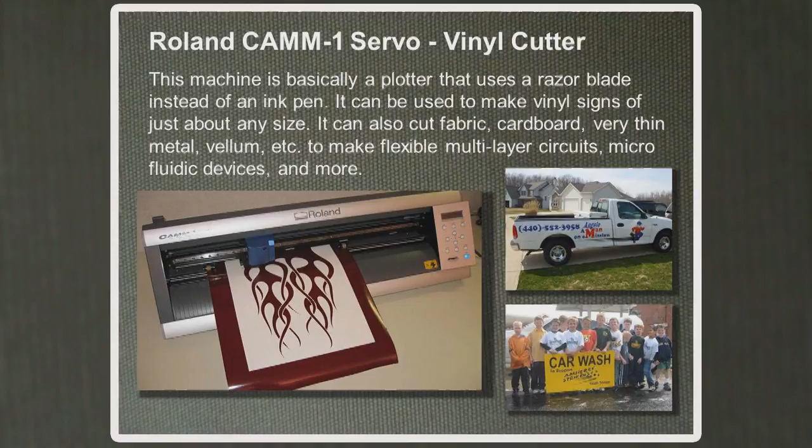I've even made microfluidic devices like flexible thermometers using the vinyl cutter. But it's made for doing the things you see over there on the right, like the signs on college vehicles, signs around campus, and people use it for garage sale or car wash signs, whatever they want.

This is the Roland Modela mill, probably the least used piece of equipment. It's very small, like the size of a printer, but it's very precise.

This same company also sells equipment used for making things like jewelry molds and teeth for dentists. They can make artificial teeth and things like that. So its claim to fame is that it's very precise.

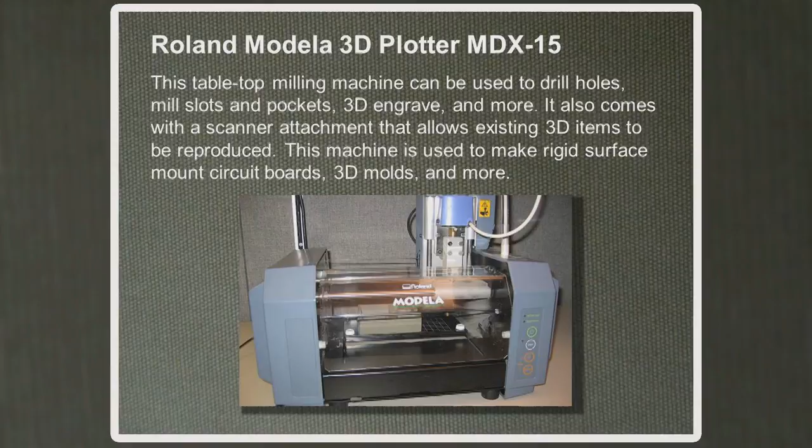It's not very large. The biggest thing we do with it is cut molds, using a foam material. It's fairly soft, not very durable, so it wouldn't be usable as a final product, but we could use it just to show somebody what the three-dimensional shapes look like.

That machine can cut parts about this size, very precisely, three-dimensional objects and things like that. The big thing we use it for, though, is to make circuits.

This is an example of a circuit made using the Modela mill. We start out with a piece of normal copper. It's not conductive on the back, and it is conductive on the top. We remove, by machining away, the copper we don't want.

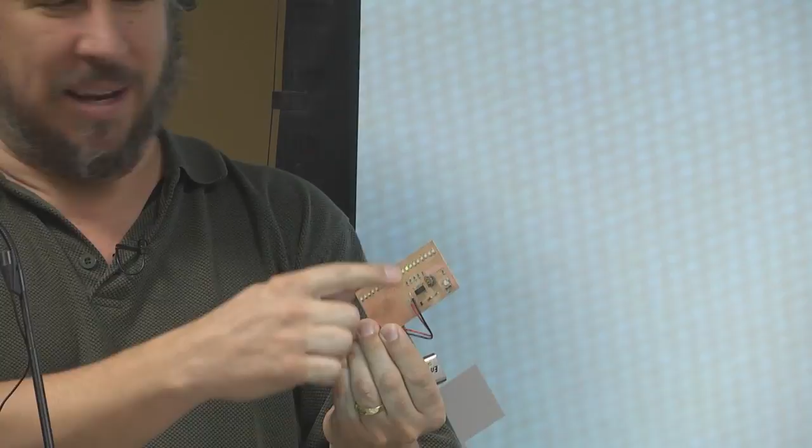When you solder that together, you end up with a complete circuit. This circuit might not look like much, but it's basically a computer. There's a chip that's been programmed - it tells it how to react, what to do. It can run multiple sequences and things like that.

And what amazes me is this whole board probably cost $1 or $2 to make. So this was the type of thing you might use as part of a prototype, to prove a concept, to make a one-of-a-kind item or whatever. You can do it very easily using the components and equipment you'd find in the Fab Lab.

Probably the most popular piece of equipment in the Fab Lab is the lasers. Our lasers are not very powerful. We have a small one called Mini that's 25 watts, and a larger one that's 40 watts. Think of a 40-watt bulb - it's not very bright, but it concentrates all that energy in one space.

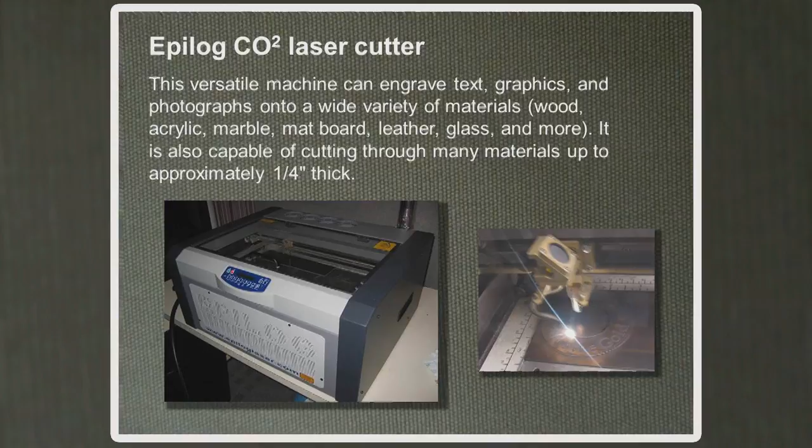There's a couple things you could do with it. It works with a lot of organic materials - cloth, wood, cardboard, and things like that. It will not cut metal, so that's one of the big limits of it. There's also some materials we can't put into it, because if it burns them, it will create toxic gases. Vinyl would be an example of that type of material.

With that machine, we can do things like engraving. This is somebody who was experimenting with engraving on denim, and it gives a pretty neat look. That's very easy to do - you just take a photograph, send it over, and it laser engraves it in.

What I like to use the laser for is cutting things like cardboard. I thank Dell for sending me lots of materials - we have an endless supply of this stuff, it appears. This is an example of a small table that I had made.

You don't want to waste a lot of time and material making it just to find out it's not going to work or that there's some flaw. So we typically will cut it out of cardboard or wood first. This is an example out of cardboard.

This would be an example out of really thin wood. You can see that you can put it together, see if it works, see if you need to make any changes, and when you're done, you go to the next level. We have another machine that can cut wood, and this would be the example of that same design.

I made some practice cuts. This is what one of the legs would look like when you put it together. Once I've got it all figured out, then I send it over, and it actually makes tables, and we can make one table or many.

But the lasers, like I said, we do a lot with them. People engrave with them. One of the things that's probably most impressive is the lasers are so precise that we can predict for the amount of material that's removed by the laser beam, and you can make things like this. This is a press-fit jewelry box, and it is so precise at such high tolerances that it will snap together, and just friction holds it together.

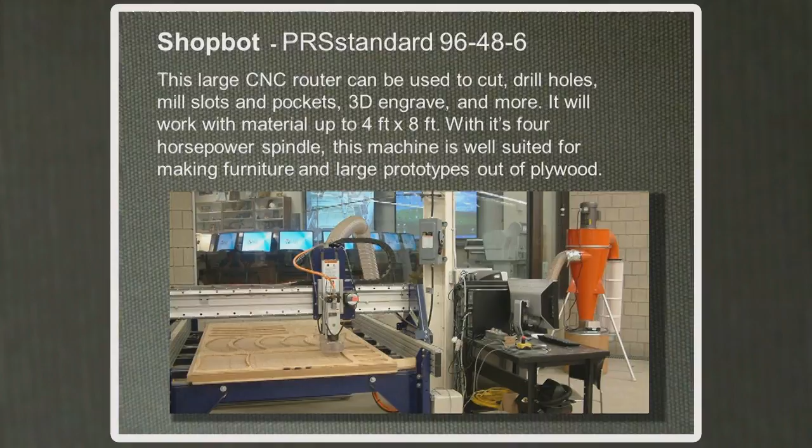The piece of wood you see inside the machine is 4 foot by 8 foot, a full sheet of plywood. So with this, we could easily make things like furniture, full-size chairs, cabinets, and things like that. This takes it to the next level. It really allowed us to make bigger, more usable objects than we had up to that point. But it's computer controlled, and believe it or not, it's very similar to the Modela mill—it's the same thing, just much bigger and stronger. It's even programmed very similarly. So that's getting to be fairly common.

There's some stuff in the Fab Lab that not everybody knows we have. It's in a cabinet, not something everybody notices sitting there. One of the things we've had for a while is a 3D scanner. It kind of looks like a metal lunchbox, but it's got 2 cameras in it and laser beams. You set an object on a turntable in front of it, and it will shine light on it and be able to completely determine all of its dimensions.

So most of what we do in Fab Labs is how do I go from the bits of the computer to the atoms of the real world. This goes the other way around. I start with a physical object I already have—whether it's a one-of-a-kind object that I can't find another one of, or maybe I've molded it by hand and it's very unique and organic.

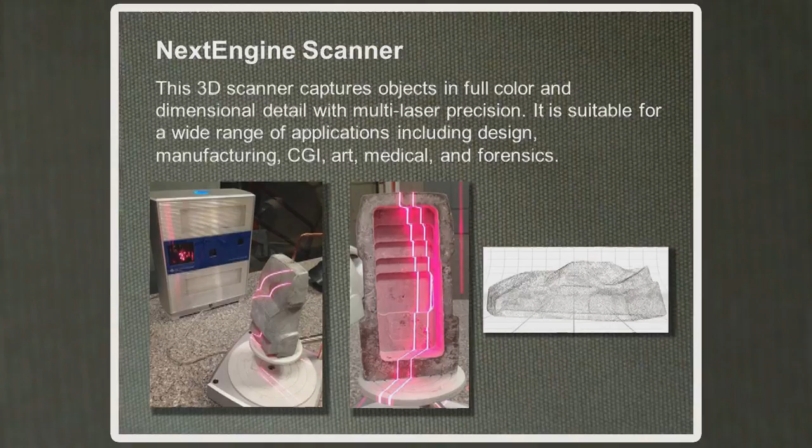What this does is it scans the object in and converts it into bits. The image you see on the right is what's called a point cloud—it's all of the dimensions related to that surface. It's a time-consuming process to scan in an object, and there are lots of limitations, but it gets the job done if you have enough patience.

But that wasn't good enough, and we got kind of frustrated by that one—it could only work with small objects and was very time-consuming. So within about the last 6 months, the Lorain County Manufacturing Council was nice enough to make a donation so that we could buy one of these.

So we now have what's called a GoScan 3D scanner, and as you can see, it's handheld. You hold it and point it at the object, and it shines what kind of looks like a barcode. What's amazing is that as you're shining it on the object, all of the information appears on the computer in pretty much real time. If you miss a spot, you just go back over it and it adds it in, so you can interact with it.

This also scans much larger objects—it's possible to scan something as big as your head or bigger. You could scan a whole person, but usually you use objects about this big, and it's a very quick process. That's a huge change in the technology, and we're very lucky to have it.

This is something else we've had for a while. Like I said, the idea behind Fab Labs was that we'd have that Star Trek replicator where you could walk up to a machine and it would just make anything you want. Now, the closest we have to that is this machine here—a commercial 3D printer. You send it a 3-dimensional file and it prints the object out of plastic.

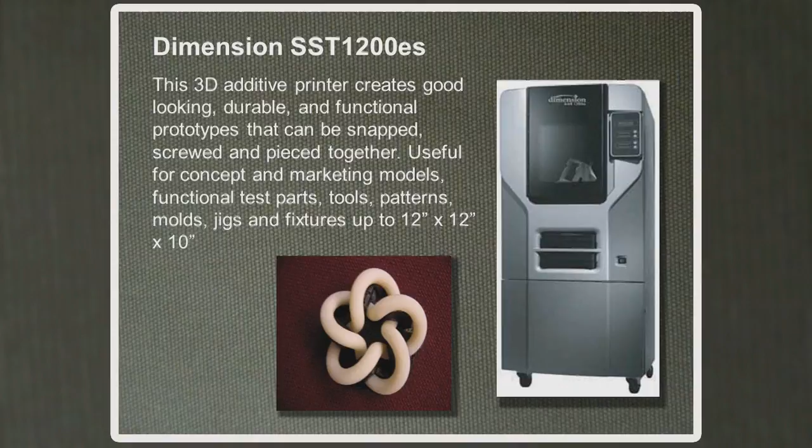This is the material we start out with—it starts out in a spool. We can only buy it from the company that makes it, and we use 2 types. This is the modeling material, the ABS plastic, and our machine also has what's called soluble support. There are some black parts here used as scaffolding and to fill gaps. That will dissolve away—it's brittle, it snaps off, and if we put it in a tank it'll completely dissolve out, allowing us to do some pretty amazing things.

So the example we usually use is this wrench. The black you see is the support material. The very first thing it does is melt this material through what's like a hot glue gun into a really thin, hair-thin thread, then lays it down one layer at a time, lowering the table and building the object bigger and bigger. The black is the support material, and the yellow is the ABS plastic.

We purposely stopped this one in the middle so you can see the different parts of the assembly—places where the two parts don't come together. When it's done, we peel it off the plate and it looks like this: you have the support material, the plastic, and in between all the nooks and crannies there's also support material. Then, when it comes out of the tank, it looks like this.

What's amazing about this is that it's functional. Most processes used in manufacturing are subtractive—you start with a big chunk of wood, cut away everything you don't want, and end up with something. This is additive; we build it from a starting material.

This is only going to evolve—it's going to get better materials, it's going to get faster, it's going to get cheaper, it's going to get easier to use, and they're starting to get into different materials.

Just like you had a black and white printer, now we have what would be the equivalent of a color printer, but it prints different color material, or maybe materials with different properties, where part of it could be rigid and other parts flexible. You might have read online about 4D printing. 3D is the dimensions, but the fourth dimension would be the material, where you could give it properties where maybe part of it is conductive, part insulative, maybe you heat it up and it bends to a shape. It could actually assemble itself based upon the properties of the materials.

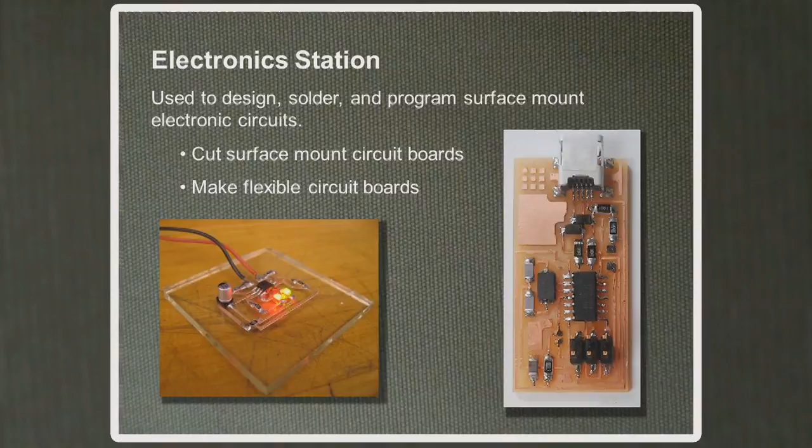So this is what one of the parts looks like that I make. And the neat thing about this is I could go from a machine that could only cut wax to a part that's made out of, let's say, metal. Because once I make this mold, there's lots of different materials you could put inside to get different properties. Urethane rubbers and metals, and this thing here is a type of material that's not quite plaster, it's much more durable than that. So there's a lot of options when it comes to molding and casting.

And the other thing is composites. We're starting to get more and more into that. I think we're going to get into carbon fiber. We've already done something kind of like fiberglassing, but it uses burlap and tree sap, so it's much safer for the environment and for the people using it. So it's environmentally conscious too, and it's easy to use.

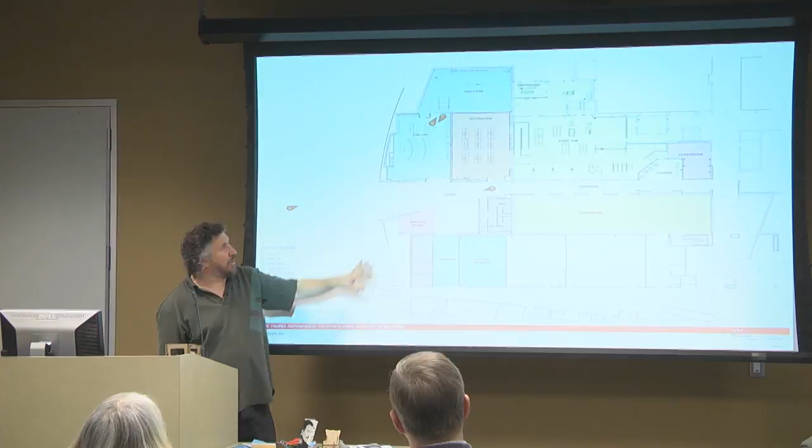So I'm happy to announce, if you hadn't already heard, that we're putting an addition on the front of our building, toward the front of the campus. It's going to have a new entrance, right here, and we're building a new and better Fab Lab. Most people, even people in our division, have no idea what this diagram is. It's nice and colorful, though.

So I have some renderings I could show you. This is the latest version, though I'm sure it's not final, of what they were working on for what the front of the college would look like. If you looked at the college center, this would be to the very right, where the PC building is, on the very edge to the right side.

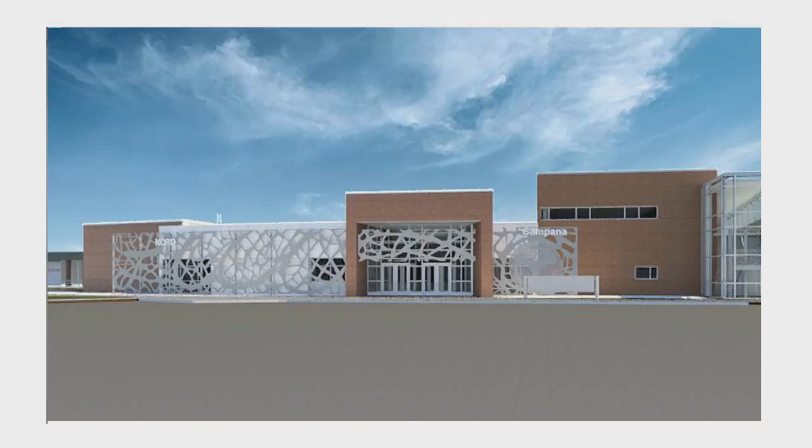So we have a new entrance, so people aren't sliding in through the back service door. There'll be a new entrance to the college, and the Fab Lab is just to the left of those big doors. This is what it looks like in the lobby as you come in through those main doors, and that's what the new Fab Lab would look like.

It would be a much more accessible space. Right now it's kind of like a classroom, and we want to make it more like a library, since it's open to the public. We want to make it inviting and easy to get into. It's a bigger space, and we're looking at getting additional equipment and being able to handle larger groups. That's one of the problems we have - large groups want to come in, and we can only handle like 12 right now.

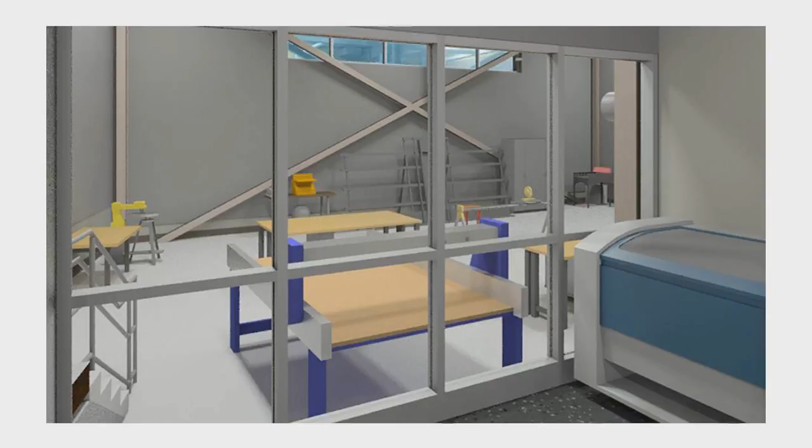We've also relocated what we call the messy fab, which is the machines that create sawdust, fumes, sticky residue, and stuff like that. It'll be segregated so it's not getting on all the other really expensive equipment that it's next to now. Part of this is that we do plan on buying additional equipment.

So we're at the phase now where we're trying to figure out what we should buy, what would be the equipment that would be most usable. I think the big thing to keep in mind is that we want equipment that is easy to use for the general public, that they can't really break, and that doesn't take hours and hours to figure out how to use.

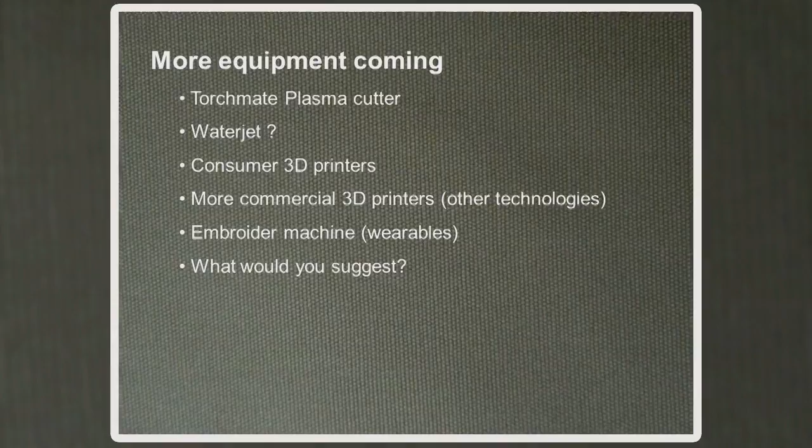But we also plan on buying more industrial equipment that would be limited access stuff, so we can make things we can't make otherwise, things that most companies can't make. For example, a water jet cutter, which could cut through thick plates of steel, glass, marble, composites. A lot of companies don't have those, and we would be able to have one. Along that line, we've got some other things - in Fab Labs, a lot of them have embroidery machines to make wearables.

So we do plan on getting one of those because they're really cheap compared to most other pieces of equipment. But if you have any ideas, talk to me, send me an email, and we can look into it. Yes, question? Do you have an additive way to create metal parts?

Not yet, but in the very near future we plan to. Will it be a 3D printer? Yes, probably. The versions we're looking at right now, if I 3D print something I can make a mold from it, and then use the mold to make a metal part, but we want to be able to print directly to metal. So that's one of the things we are planning on getting. That's more expensive and farther down the road, I imagine. Well, this will be within a year. They are supposed to open this building up about a year from now.

Second question, if I may. Your limited access items, what is generally required to get access to those? Is it somebody shows you, you show that you understand, and they let you go, or do you need to take a course?

The limited access stuff, two examples of the variations would be the 3D printer, which is real easy to use. If you've used a printer, you can print. It's expensive though, so we want to make sure people aren't printing things that won't come out. So we do that as a service. People send us the file, we charge them based upon the amount of material that's used. We're not trying to make a big profit, just trying to cover the cost of the materials and the service on the piece of equipment. So if you want 3D printing, that's how you do it. We could walk through it with you if you wanted to, but most people just send us the files.